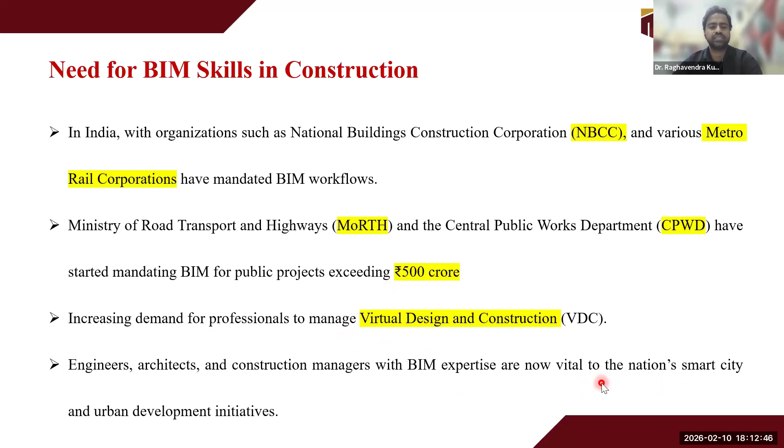So with this kind of basic background, we try to emphasize that virtual design and construction has got its prominence day by day. It is increasing, and all the professionals as well as stakeholders - that is engineers, architects, as well as construction managers - are playing a key role to enhance their BIM expertise to make sure that the nation's smart city as well as urban development initiatives are rightly incorporated.

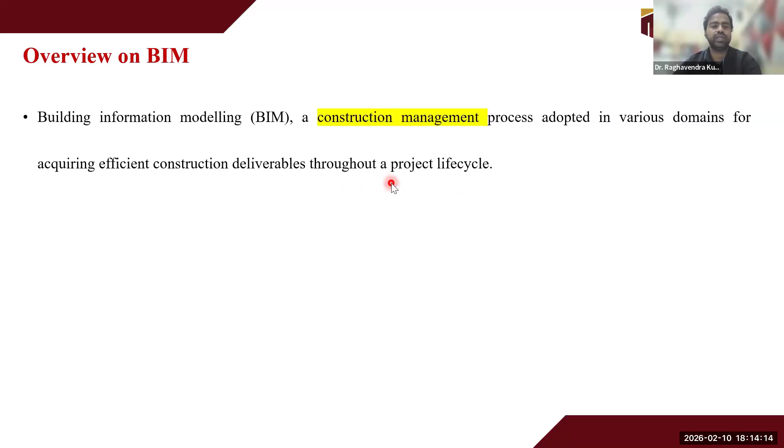So just the definition is that most textbooks or even the literature say that BIM is basically the construction management process which is adopted across the project lifecycle for achieving multiple deliverables. So now in this construction management process, you utilize or manage multiple virtual representations for each and every physical as well as functional characteristic, either it can be a building, a physical asset, or a functional asset, throughout consolidating the multidisciplinary data. So we'll be discussing what this multidisciplinary data is all about in the upcoming stages of our presentation for today.

So where we try to incorporate multiple tools, technologies, as well as software. Definitely, BIM is not just usage of one particular tool - maybe for example the very well-known or widely accepted tool is Autodesk Revit, right? It is not just one tool focused only on the aspect of 3D, which is geometric modeling, whereas it is a process where you incorporate multiple tools, technologies, and software throughout the project lifecycle. So that is the basic core point which everyone needs to comprehend when understanding the BIM process - it is basically a platform to share knowledge or information throughout the project lifecycle.

So this is the basic background which all of us are aware of. So moving ahead without discussing or emphasizing more on this, let's proceed further.

I believe this topic has been covered earlier, where we can see the multiple dimensions of BIM, as well as how the dimensions have progressed right from 3D till 10D. So currently we prefer to say 3D to ND, where you can coin the letter N as numerous dimensions, because at each and every dimension you are trying to acquire multiple data in its relevance for the project deliverable.

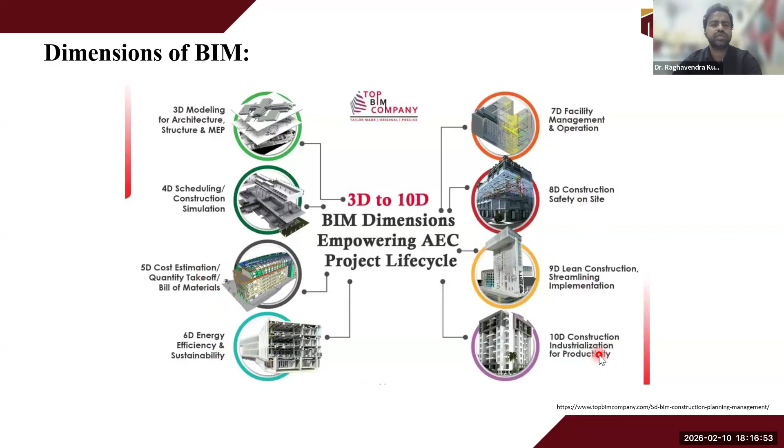So this is about the multiple dimensions in BIM. Now going to the main crux of today's topic, with respect to service management. Let's see what service management is all about.

So let's see what this BIM for service management is all about. Service management is basically about the emphasis on MEP, which is the well-known term mechanical, electrical, and plumbing technicalities. Let's see what MEP comprises of in the aspect of components.

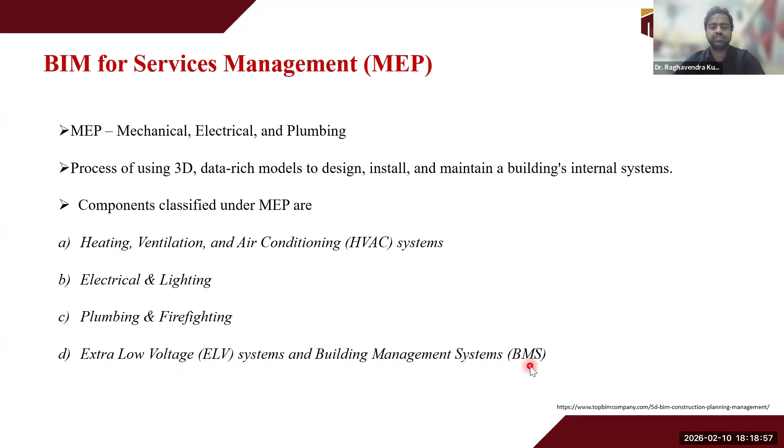So the primary components here: the first one is said to be HVAC system, which is heating, ventilation, as well as air conditioning system. Later we have electrical and lighting system. After that we have plumbing and firefighting equipment system. Next we have ELV, known as extra low voltage system, and the other one is BMS, which is focused on building management system.

Right, so here you can see one particular snapshot, or captured image, where MEP work has been done for a particular kind of industrial building, showing how the coordination can be done.

Now, just to have some responses from the audience, can I know what are these red color pipes? Let's keep it slightly academic, interactive. Can I get some responses from the audience?

Maybe firefighting related. Yes, exactly, very good answer. That is the firefighting equipment element modeling done.

Then next, moving ahead, what is this kind of pinkish color type of modeled element? If I want, I can zoom in a little bit. Yeah, this pinkish color, ash and pink colored borders.

Any responses? Sanitary fixture. Come again, you are not audible. Sanitary fittings. Actually, these are HVAC systems, right? So they are the ducts provided.

And next, any reflection on the green color pipelines? I think now your answer will suit into this. The person who has just now replied, can you say now?

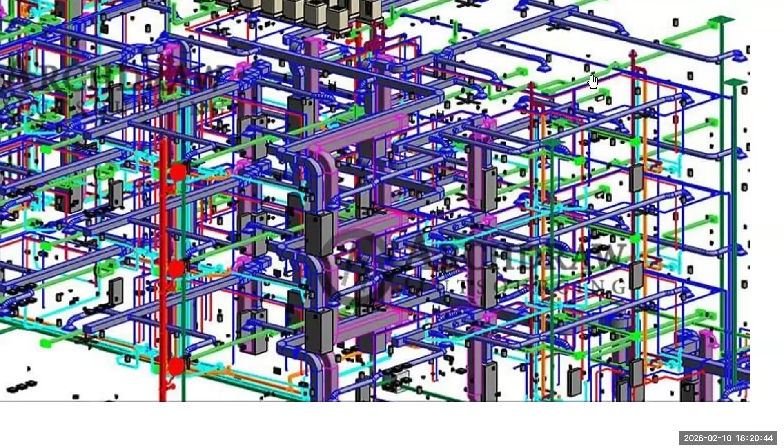Any response? What are these green color pipelines? Water pipes. Yes, madam, it is definitely water pipe.

In buildings, there are multiple types of water pipes. It can be a hot water pipeline, a cold water pipeline, or gray water, which is the drainage pipeline. Generally in Revit, we prefer to create green color pipelines as the sanitary or gray water pipelines. That is how different colors are given when you work on MEP models on any tools, representing it in a BIM environment. Thank you, we had very good responses from the participants.

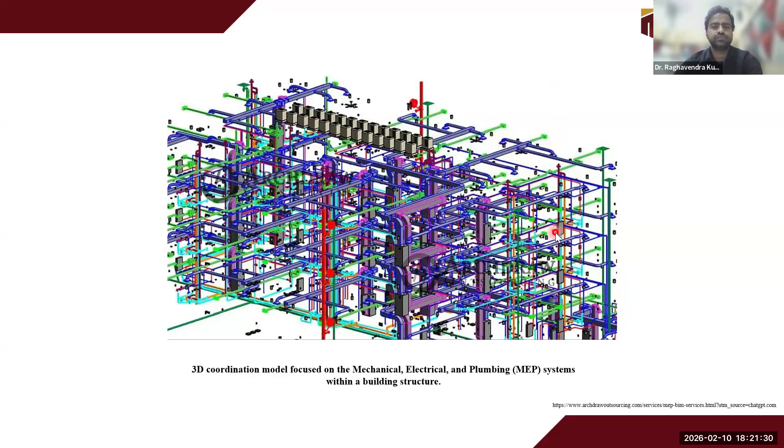Let's proceed to see the different components, with a brief or in-depth understanding. For the mechanical system, we have HVAC system as well as firefighting equipment, and also elevators as well as escalators, maybe in the case of any residential or commercial building.

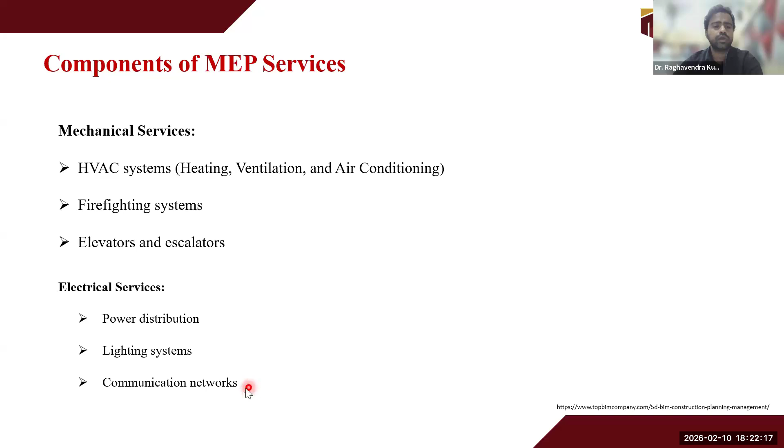Coming to electrical services, we focus on aspects such as power distribution lines, lighting systems, as well as communication networks, either with respect to CCTV, relevant ducting work, or any kind of communication network such as data cable networks, where we provide multiple landline or Wi-Fi routers and other electrical ductwork.

Here you can see some representations in the realistic appearance, with respect to the mechanical as well as electrical services.

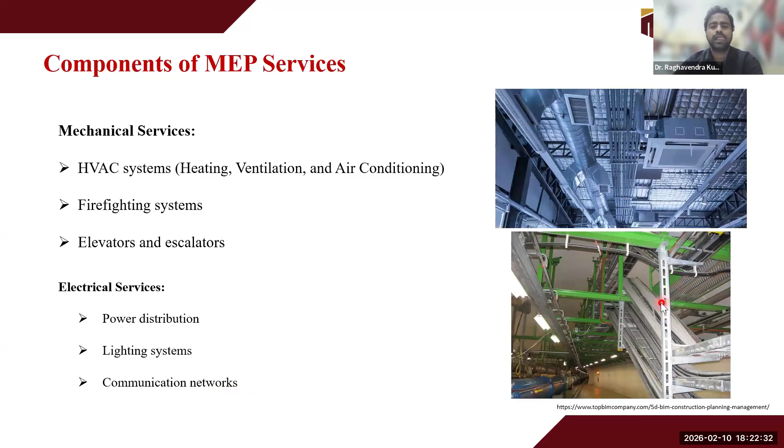Moving ahead, the next one is plumbing services, where we focus on water supply and distribution, drainage systems, and sanitation and waste management. When we say plumbing services, let's not limit our thinking only to the superstructure of the building, because besides the superstructure we have the substructure as well, where we have utility layouts - the underground utility layouts, focusing on multiple underground pipelines.

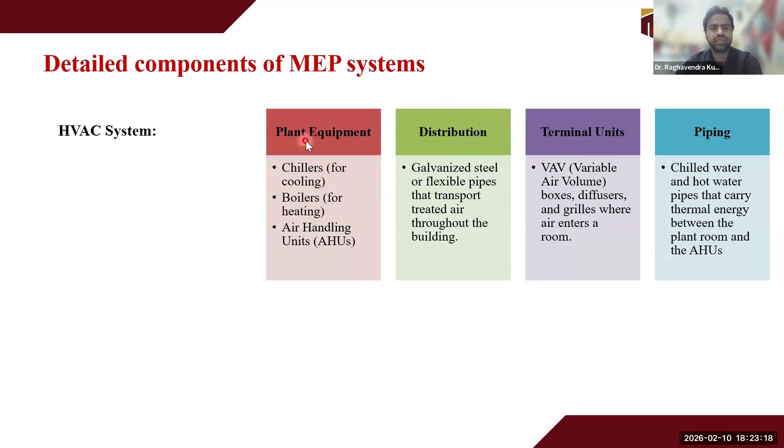Let's see the detailed components of the MEP system. The HVAC system comprises 4 categories. The first one is plant equipment, where we focus on modeling aspects such as chillers for cooling purposes, boilers, and AHU, which is air handling units.

Next, coming to distribution, we have aspects such as galvanized steel or flexible pipes that transport treated air through the building. Then terminal units, known as VAV or variable air volumes, with respect to boxes, diffusers, grills, where the air enters the room. Then piping connections, such as chilled water and hot water pipes that carry thermal energy between the plant room and the AHU.

This is one typical representation of how you can create an HVAC system for any desired building model. Let's proceed to the electrical system, focusing on aspects such as service entrance and transformers, where utility power enters the building and steps down to usable voltage. Then distribution board, with multiple MSB, main switchboards, and DB, distribution boards, which split into multiple individual circuits.

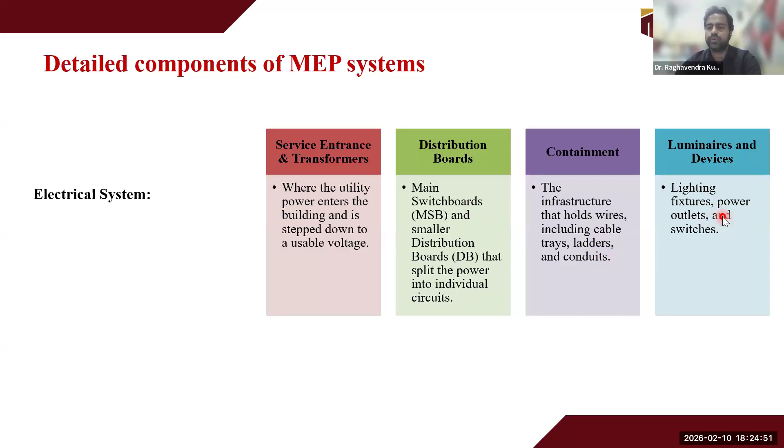Then containment is where you hold your wires as well as cable trays, ladders, and conduits, pipings etc. Luminaires as well as devices focus on the placement of multiple model components such as lighting fixtures, power outlets, and switches.

Coming to the plumbing system, as explained, we focus on both substructure and superstructure plumbing systems. This includes the network of PVC pipes which deliver potable or drinking water for sinks, showers, and kitchens, and then sanitary waste, focusing on large diameter PVC or cast iron pipes that use gravity as their main mode of water transfer.

Then the vent system, focusing on vertical pipes that extend through the roof to equalize air pressure in the drainage system. And fixtures, which cover parts such as toilets, faucets, water heaters, sinks, etc. These are some of the fixtures you focus on for placement in the plumbing system.

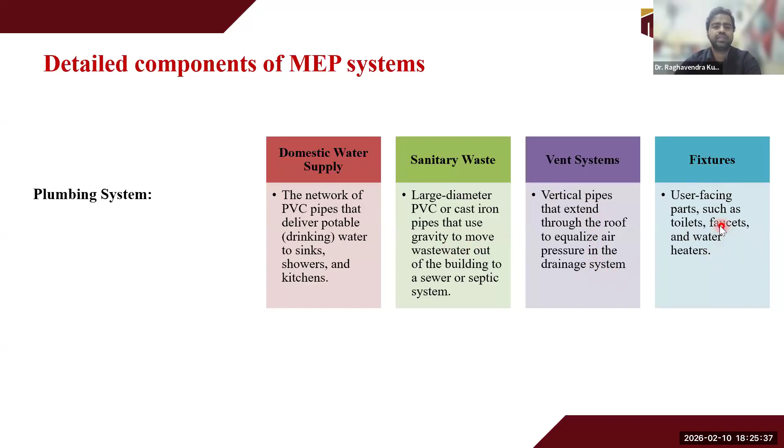So now how do you rate this, or how do you have an approach? Basically all of these multiple parts or components we discussed are assigned metadata. Metadata is a particular kind of data integrated to each component, where it's not just the physical appearance, but also includes material, flow rate, system type, etc., which will eventually help in calculating the kind of pump strong enough to push water to upper floors, or the electrical circuit if overloaded. So each part, fixture, or device installed into the building model should be assigned metadata, which is the core crux in your MEP stage.

Now let's see the different features we focus on in service management using the BIM aspect. We have multiple features divided into 3 phases. The first is design and clash detection. The second is prefabrication and logistics. The third is facility management, which will be our topic of interest for today.

Let's see individually these 3 aspects or phases focused in service management using the BIM concept or tools. Firstly, let's briefly understand what a clash is. People working in the BIM domain will be very well aware of this. Basically, a clash is a particular kind of collision or interference happening between two or more elements, where you try to reflect and see the discrepancies in the model.

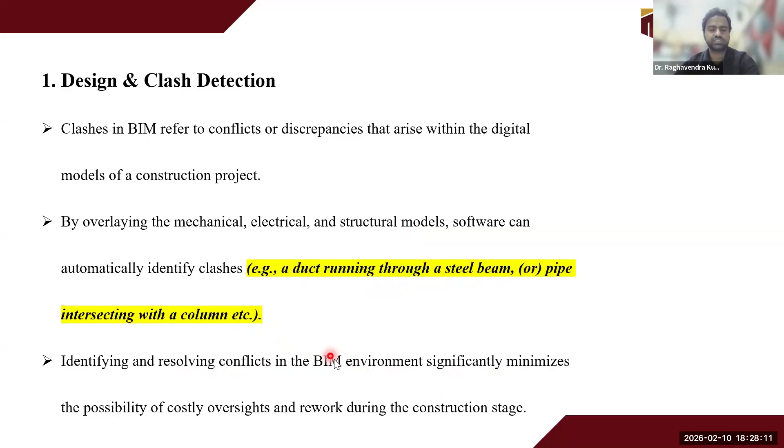For example, mechanical, electrical, and structural models are overlaid one upon the other, and after overlaying, you try to identify that one component is getting intersected or collided, or even has duplicacy in its placement. So a duct running through a steel beam can potentially be a clash, or a pipe intersecting with a column, etc. So the task for BIM environment stakeholders is to identify and resolve these conflicts or clashes. There is a particular workflow to be incorporated.

Let's see what this workflow is all about. I have zoomed into the workflow to be done. Firstly, you integrate the model, that is the multidisciplinary model. For example, you have an architecture model, then your structural model, after that your MEP model. You integrate all together and make that a coherent model or multidisciplinary model. Once you integrate and receive a federated model, you detect the clashes using n number of tools.

One of the famous tools may be, for example, Bexel Manager or Navisworks. Such a tool can be used to detect the clash. Once you detect the clash, you identify the clashes. Identification is the process where you observe what magnitude is happening, as well as what is the placement of the particular clash beyond the structure. Then you report the clash, generating the clash report, and proceed further for the resolution.

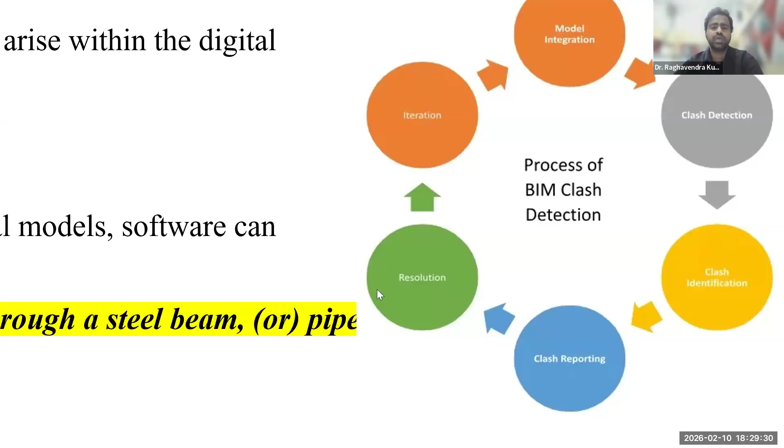So the resolution of the clash should be done back again in the authoring tool itself, that is, wherever you developed the model, maybe Revit or Tekla Structures, your design authoring tool. There you should resolve the clash and see what different iterations are possible with the multiple clash-free or clash-detected elements, where you're trying to rectify and resolve it. Then the final feasible iteration will again be integrated and made sure that it's a clash-free model. That is about the design and clash detection which can be performed in this task.

Going a little further ahead, let's see the different types of clashes in the BIM environment. The first one is a hard clash, shown in the picture on the right side, which helps check the clashes between an individual group of elements, detecting whether the elements go through each other or not.

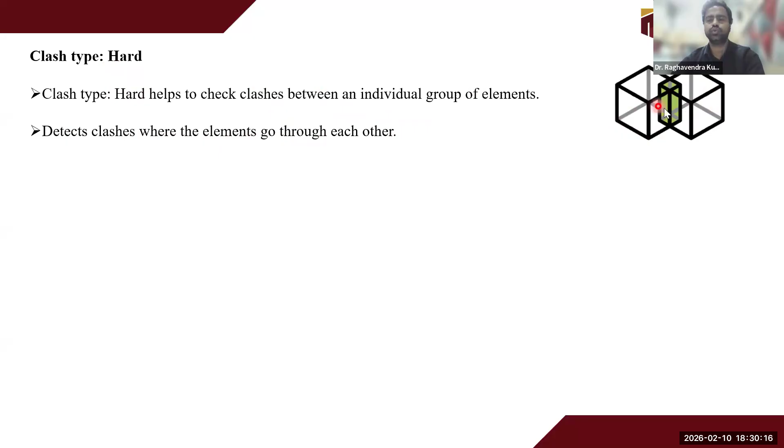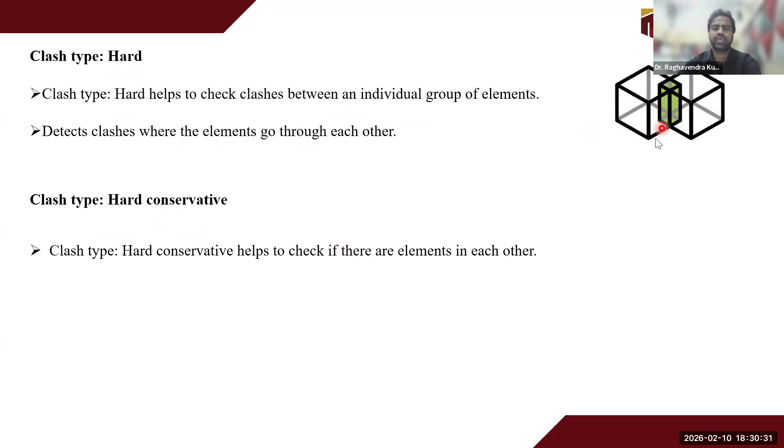You can identify that from the first type, that is the hard clash. The second clash we have is the hard conservative, where you check if there are elements within each other after having a hard clash, and later check again if there are some more elements happening in that. That is hard conservative.

Then you have the clearance clash, where there might not be a clash happening, but it is entering the buffer zone, which might not be feasible to execute in a practical way. For example, there needs to be some minimum spacing given for a column as well as a window, which is an architectural component. You cannot place both components very side by side.

Then the next type of clash we have is a duplicate clash, where you can see one model getting completely overlapped with another model. That is said to be a duplicate clash.

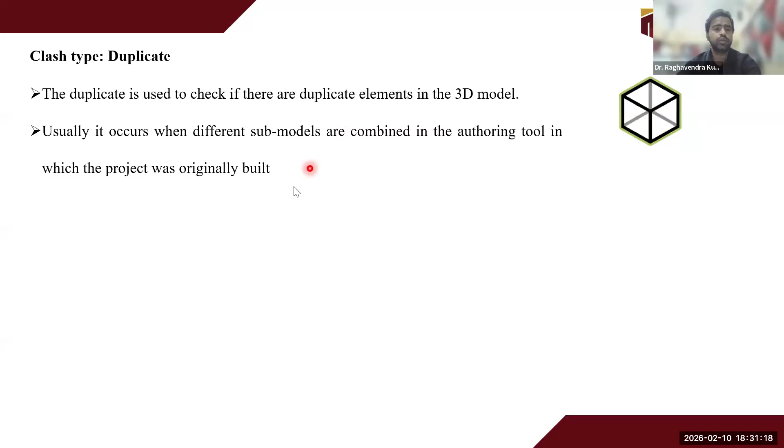And then the other type of clash we have is the containment clash, where there are multiple elements or more elements within the defined or constrained room or space, rather than one or more other container elements. So these are the different types of clashes which you can look forward to and try to detect when working with the aspect of MEP models.

We will have a slight demo after we finish the entire presentation for today. We will run a particular clash test for an MEP model and check how the clashes can be detected. Now, the next phase in this service management using the BIM environment is the second phase after the first one, which is clash design and clash detection.

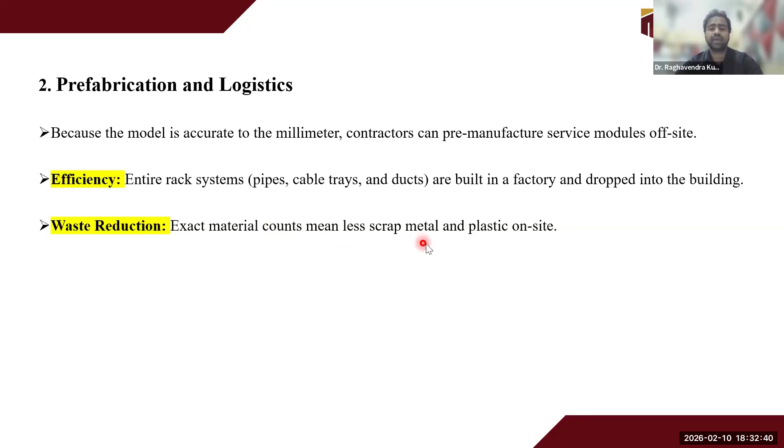The second phase we have is prefabrication and logistics. So let's see what is the potential of this. With model accuracy in millimeters, contractors can pre-manufacture all the service modules offsite itself. Efficiency can be focused on the entire rack system, such as pipes, cable trays, and ducts, which are built in a factory and then dropped into the building. You can also focus on waste reduction, which can eventually be a hazard at the construction site, since the exact material counts mean less scrap metal needs to be taken to the site and assembled during construction.

And then the next one, we have the third phase, that is facility management. Facility management is entirely about the post-construction aspect - what is the core crux of your asset or the particular facility you have created in the building. It can be a swimming pool, an elevator, an HVAC duct, or a sprinkler system.

What entire type of maintenance you are trying to focus on for this particular asset is what we focus on in the facility management aspect, where the BIM model itself becomes a digital manual for the entire life of the building. You track the asset with the model dependent on manufacture date, warranty info, as well as maintenance history. Then IoT integration can be done into this stage, where the latest BIM applications are used to establish a very good interface between the real-time model and the virtual model.

Here you can see a slight workflow on the right side of the presentation, where you have the 3D model, and you try to interpret the asset data as well as maintenance schedule and the IoT sensors, which are integrated from the real-time construction. Then you can use it in virtual dashboards, for example tools such as Power BI, to eventually reflect on your facility management aspect. That is about facility management, which covers the three key phases in service management using BIM.

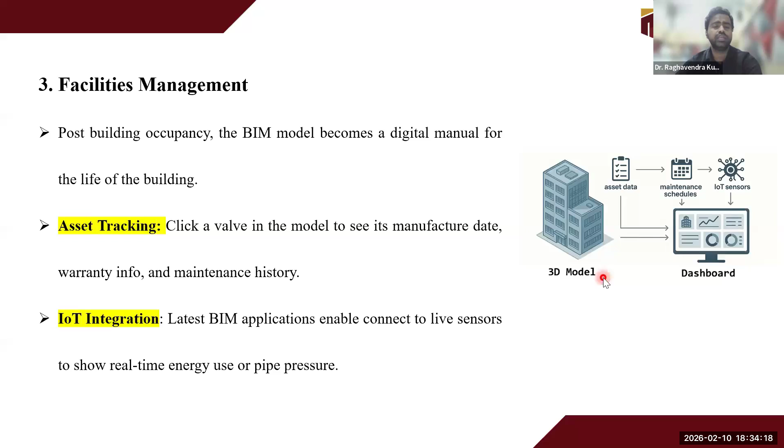The first one is Autodesk Revit, a prominent tool helpful for the authoring purpose of design and analysis. For clash detection and coordination, you can focus on Autodesk Navisworks. Another one is MagicAD, which helps in the mechanical design solution, and also Dynamo, which is a latest plugin for computational design purposes, where you can eventually speed up the entire modeling or design aspect.

Then we have the other collaboration platform, ACC, known as Autodesk Construction Cloud. So this is about the tools for BIM in the MEP stage. That brings down to the first stage of my discussion with respect to BIM for service management.

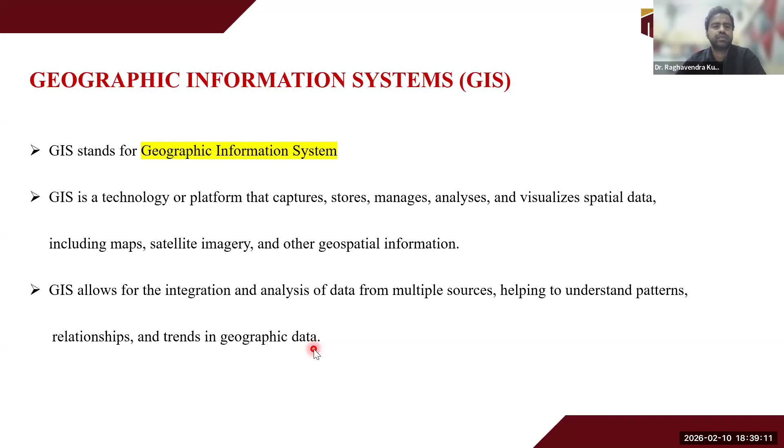We have multiple sources here, maybe a Bhuvan portal, or a number of paid or unpaid platforms, also free portals, where you get the data from the sources and help in understanding the patterns, relationships, as well as trends in the geographic data. It can be rainfall data, population data, or any kind of water data or disease data. It is unlimited, or the range is large.

So that is with respect to geographic information system. So what does it address? Basically it can address a location, a quantity, or the measurement, whatever you have focused on, and it helps in understanding the patterns as well as trends, and also reflecting the surrounding conditions, relationships, as well as topographical establishments, and also implications or predictive analysis which you are planning for the future.

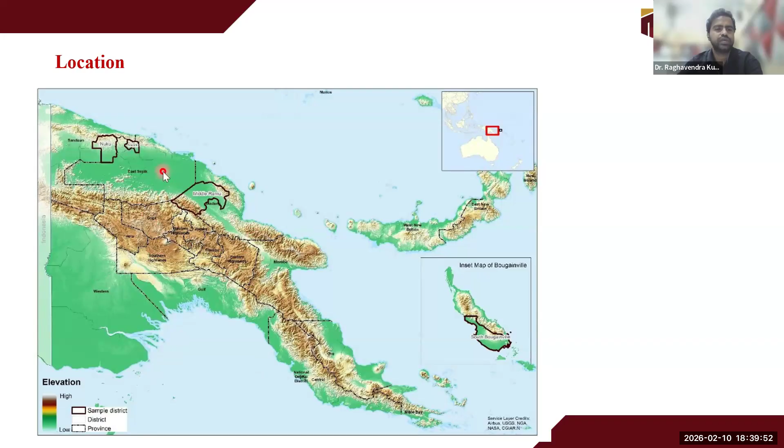So eventually you can have an understanding like this, focusing on how the topography is there in this particular location, representing the sea, the rock, as well as the green cover. So that is some understanding with respect to this particular map.

Now let's see the context of BIM and GIS integration. Unlike a building with a fixed footprint, infrastructure lives within the landscape. It needs the entire overlay or understanding of the topography, how the infrastructure will look after construction happens. So BIM models are overlaid onto GIS data, where topography, soil types, and existing underground utility lines are enabled to understand the environmental impact.

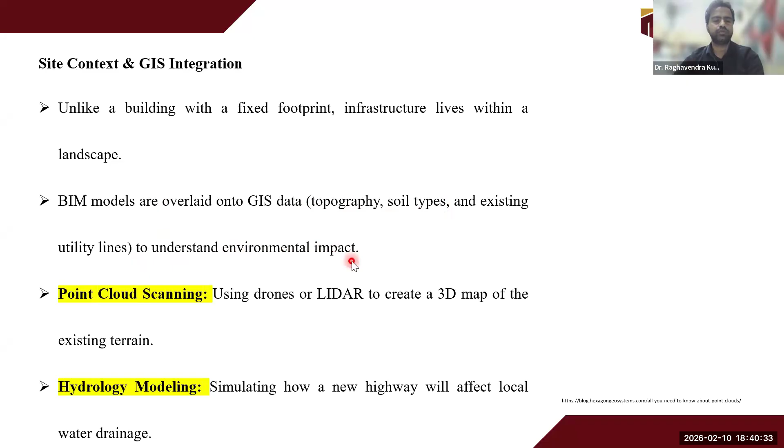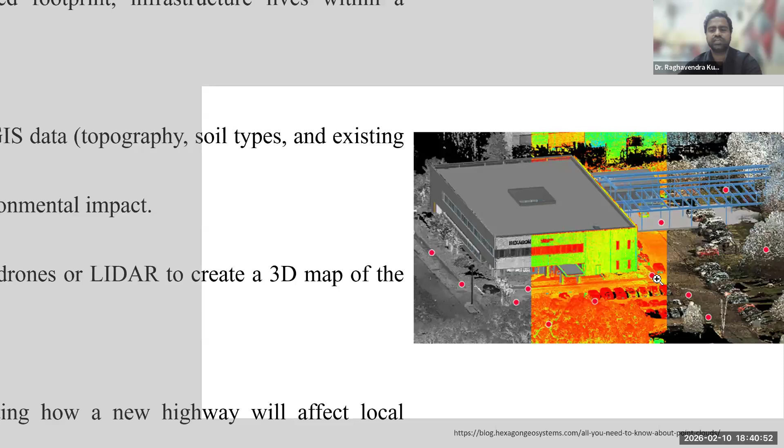Now, to make realistic conditions reflected as GIS data, one of the prominent or latest tools we use is drone or lidar, which helps in creating a 3D map of the existing terrain. A point cloud can be generated using any UAV, that is your unmanned aerial vehicle, which will eventually help in understanding the true or real condition of the particular geography.

And then you can also try to simulate hydrological modeling, where you can simulate a new highway which will affect your water drainage, etc. So that is with respect to site context and GIS integration.

So you're focusing on alignment planning, such as optimizing the path of a road to minimize earthworks, cutting of hills, or backfilling of valleys, etc.

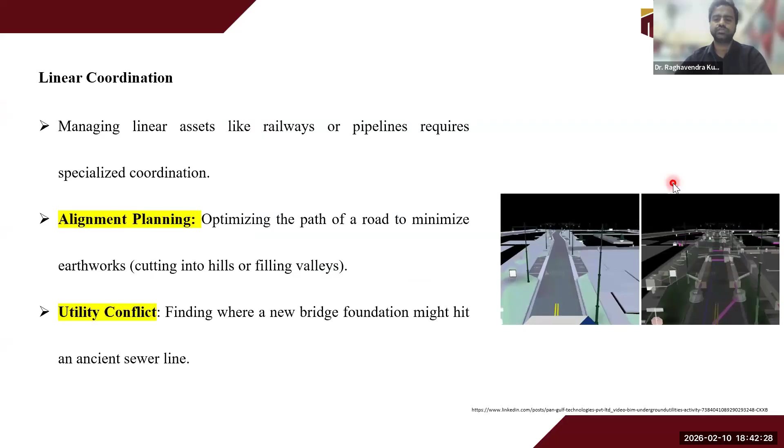And also utility conflicts, finding where a new bridge foundation might hit or overlap with an ancient sewer. Utility conflict is something we discussed earlier, that is a clash, where you focus on understanding whether these underground utilities are having any clash or conflict, or interference with one or more elements, or a seamless arrangement in the substructure.

So let's see the workflow, how this can be done. In this aspect, BIM basically focuses on a high level of detailing. When focusing on BIM in an architectural parameter, you might be exposed to a topic known as LOD, level of development, from the conceptual design LOD 100 till the last one, LOD 500, known as the as-built model, where you're entirely focusing on each and every minute detail in the geometric modeling aspect.

Then in the aspect of GIS, it focuses especially on the building position concerning the environmental context as well as the global coordinate system with respect to the project you're planning to establish. So when you integrate both these concepts, it will eventually help you fetch high detail building data with the real world geographic context.

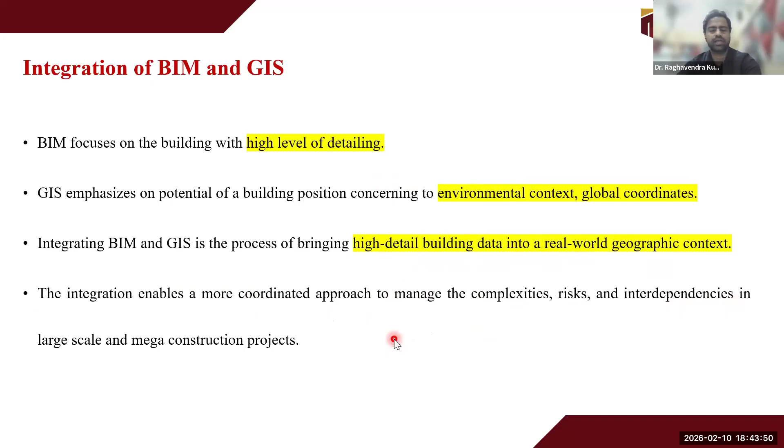So with the advantage of both these platforms, you will finally get a very seamless realistic world representation. This integration helps a more coordinated approach to manage the complexities, risks and interdependencies in large scale as well as mega construction projects. We will discuss that ahead with a couple of case studies also.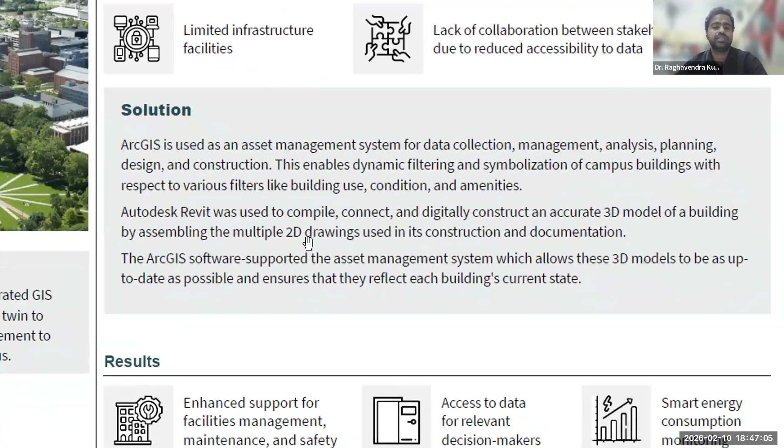Then Revit was used to compile and connect the digital construction of an accurate 3D building model, which had been done by assembling the multiple 2D drawings used in construction and documentation.

Eventually, the results in this particular case focused on enhanced support for facility management, as well as maintenance and safety, and access to data for relevant decision makers, as well as smart energy consumption monitoring, done throughout the project life cycle. That is with respect to the first case study.

Let's see the second case study: design coordination tracking for collaboration of the HS2 railway line, in London, Birmingham, UK. Let's see what is the basic challenge with respect to this project.

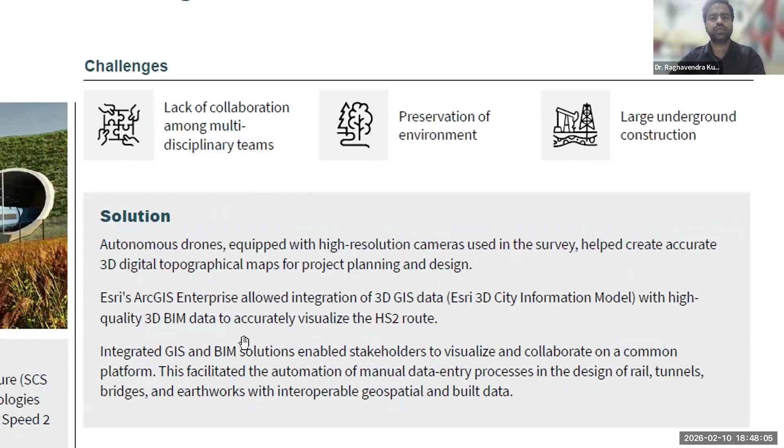The challenges faced in this particular case are lack of collaboration among the multidisciplinary teams. Since it is a railway project, you will understand that the structural team, GIS engineers, and MEP engineers are working together in the railway line alignment etc. Then there's preservation of environment, as well as a large underground construction involved for this entire stretch of the railway project.

Let's see the solutions, how they approached this. Autonomous drones equipped with high resolution cameras were used to help in capturing the survey data, where they acquired an accurate 3D digital topographical map.

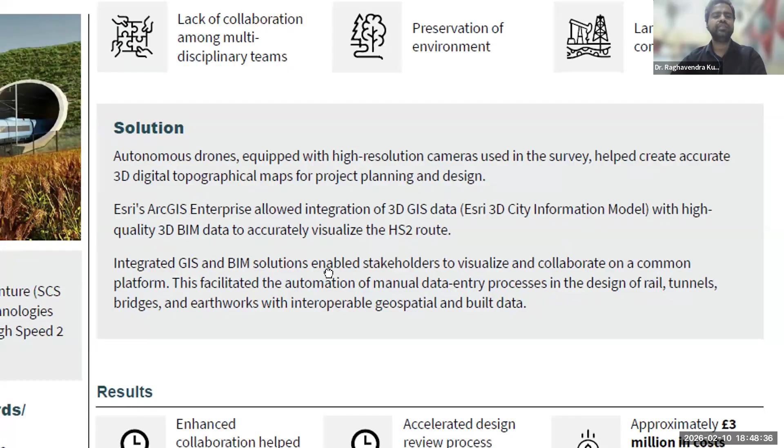ArcGIS Enterprise allowed integration of 3D GIS data into the Esri CIM, that is city information model, with high quality 3D BIM data. This integration eventually helped all the stakeholders visualize and collaborate on common platforms, and they automated the manual data entry process in the design of rail, tunnels, bridges, and earthworks.

The focused results are that 30% of project duration was saved in the planning stage itself, the accelerated design process saved 20% of time in the design stage, and approximately 3 million pounds was saved in the cost of the pre-construction phase of this particular project.

So this is about the application of BIM and GIS integration in infrastructure management. Let's see some tools in this regard. What are the different tools we have?

Tools in this integration include Autodesk Civil 3D as well as InfraWorks, which focus on roads, drainage, and site grading. Then we have the very famous tools from Bentley, Open Roads as well as Open Bridge, which focus on large scale rail as well as bridge infrastructure.

Then we have Autodesk InfraWorks, as well as the Forma add-in for Autodesk Revit to import your GIS data, as well as the ArcGIS GeoBIM platform, which is an integration for this entire simulation of BIM GIS integration.

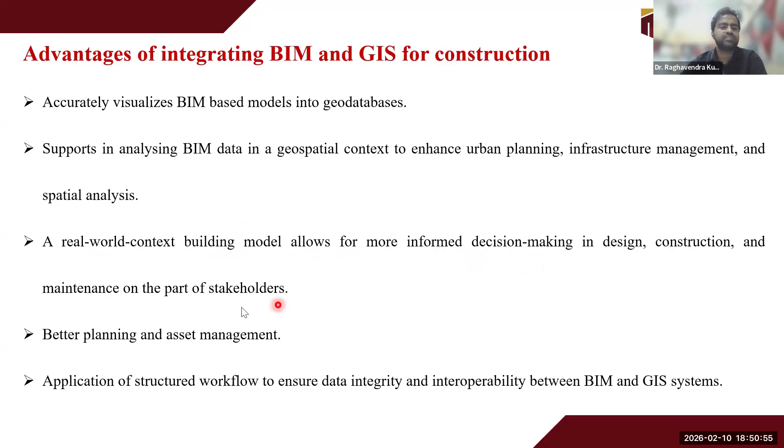Whether it can be an urban planning project, or infrastructure management, smart city planning, etc., or spatial analysis, it eventually helps in the real world context of any particular building model, which allows informed decision making for multiple stakeholders and the relevant planning stages. It also helps in the asset management process as well.

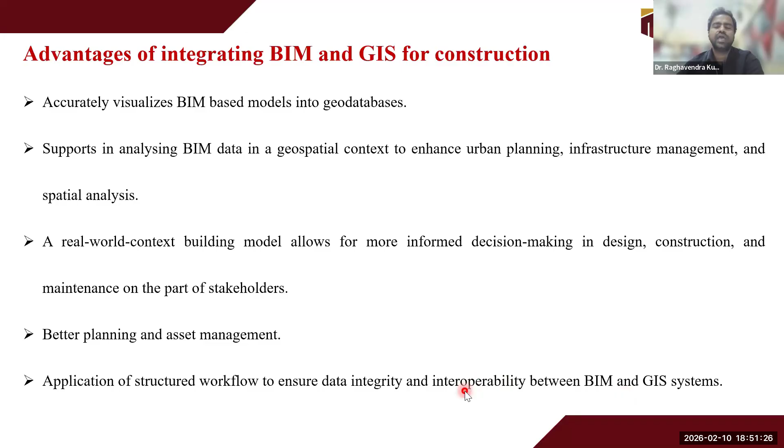Application of this structured workflow will ensure data integrity as well as interoperability among the BIM and GIS system, where you will not have any data restriction or closed BIM environment. Everything is evaluated and executed in an open BIM environment, where you can use multiple platforms without any data restriction.

And eventually it is encouraging the scope of interoperability in a BIM environment through open BIM context. So let's see the conclusion for both stages: the first topic of BIM for services management, as well as BIM for infrastructure management. Firstly, as we know, BIM is not just about any one particular software or tool.

Basically, it is an entire construction management process which is applied throughout a project lifecycle as a strategy, where the designers can eliminate the physical conflicts before execution, and the contractors can build faster and safer using their prefabrication works.

And also the BIM and GIS integration, which was our second topic with respect to infrastructure management, is changing the construction and infrastructure industries. This combination of BIM and GIS with spatial context is enabling multiple stakeholders and project teams with an opportunity to make projects more sustainable as well as smarter with cost-effective outcomes.

And also this application of BIM and GIS is very vast. You can see the case studies as well, where you can apply it to multiple aspects such as urban planning, solar power projects, highway construction, disaster management, etc. So that is with respect to the topic given to me, that is BIM for infrastructure as well as services management.

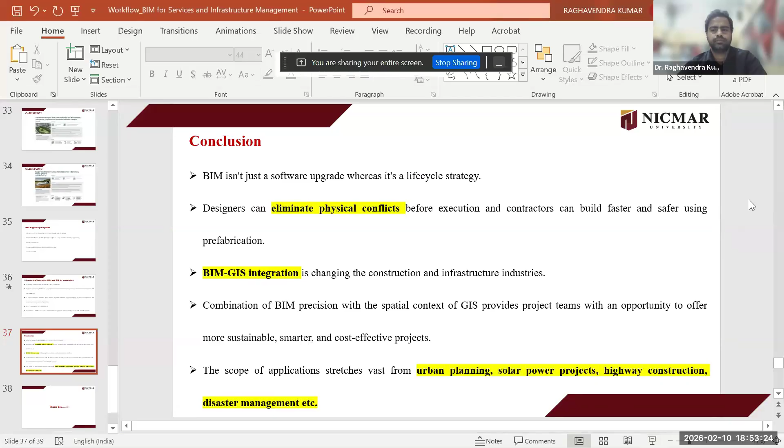Very good evening, sir. Yes, please. Very good evening, sir. Till now, presentation was very good, sir.

The BIM application is used for treatment plants, wastewater treatment plants or sewage treatment plants. It is possible, sir. Any dam structure designs? Yes, we can definitely use BIM and GIS integration for wastewater treatment plants as well.

You eventually know that wastewater treatment has multiple stages of treatment it undergoes. So you can entirely fetch the digital twin of the entire wastewater treatment plant, and then make sure that any changes or modifications you want to apply to the real-time construction are employed through the digital twin in a seamless manner, ensuring the changes are replicable to the real-time construction as well. Yes, that is very much possible in the domain of BIM and GIS integration.

It is suited for dam structures also, sir. Yes, we have multiple case studies for dam structures as well. If I can recall, one of the dams in China was also covered in a paper I read, which was the usage of the BIM concept itself.

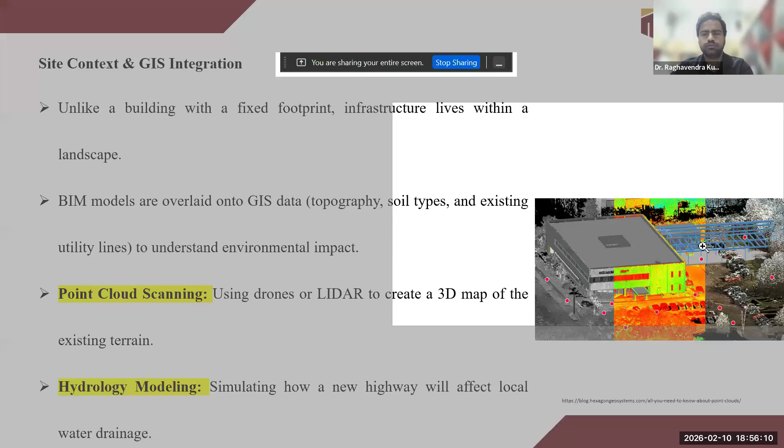When you are capturing the data using your drone or any particular tool, there are multiple formats to fetch this data. One format is point cloud data, and you can also get the entire data as a PDF image with lines and other commands. You can then use that data to build the entire structure in a 3D way, and for that there are multiple tools.

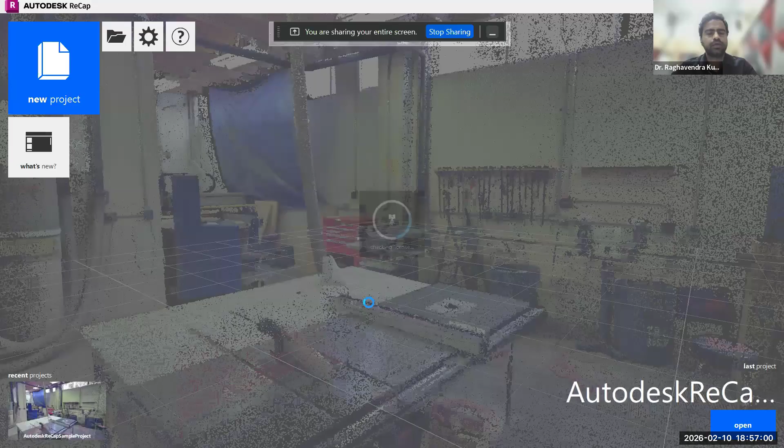One tool I would suggest is Autodesk Recap. I'd like to run it for your understanding. Using this, you will get something like this at the initial stage, where everything is in the form of point cloud data. Can you see this?

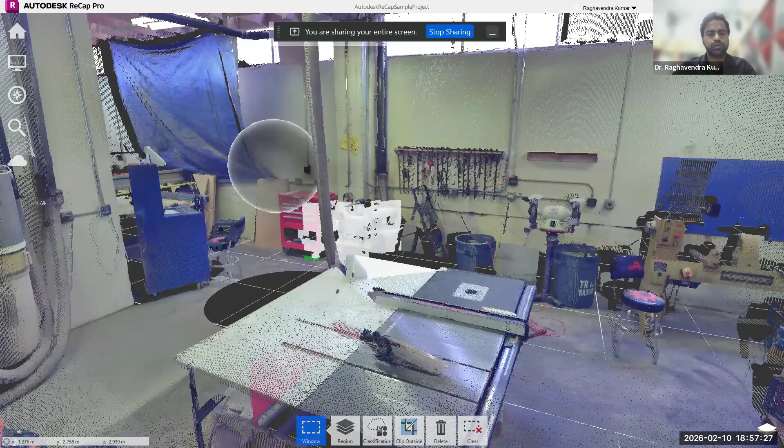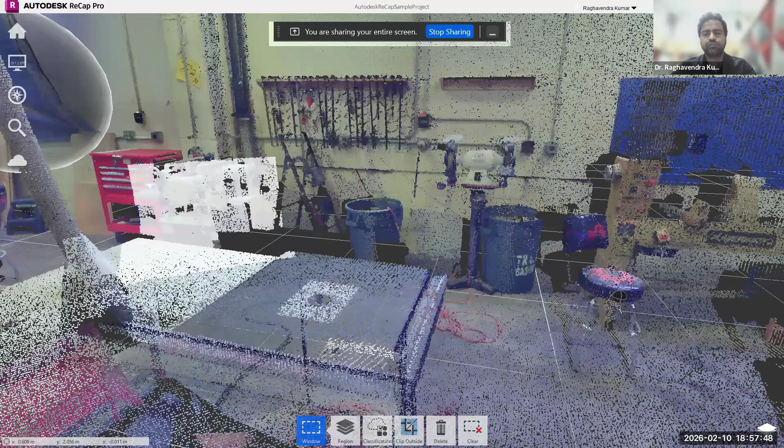Am I right? Yes sir. Now you use this point cloud data, import it to Revit, and recreate the entire structure based on how you captured the data. This can be done right away from Revit itself.

So one particular topic you can refer to is the aspect of Heritage BIM. If you see multiple case studies, for example Roman or Italian structures, most renovation projects happen through this concept of HBIM only. I'll display that here in the chat box. HBIM stands for heritage building, heritage BIM, or some people also call it historic BIM. So all your heritage structures are being renovated or reconstructed using this particular concept.

So that is one of the main useful applications using your drones, or any laser scanners, lidar scanners, etc. Not just drones, but also lidars.

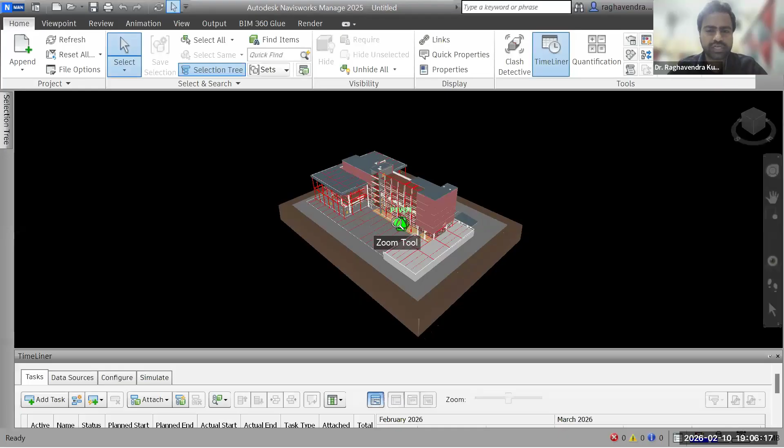So here I have tried to load one project in Autodesk Navisworks. When I selected files, you would have observed that I selected three files. Let me show that again. So here you can see it is a structural file, MEP file, as well as the architectural file. This is the composition of that particular file where I have integrated and made it a federated model to run the clash test.

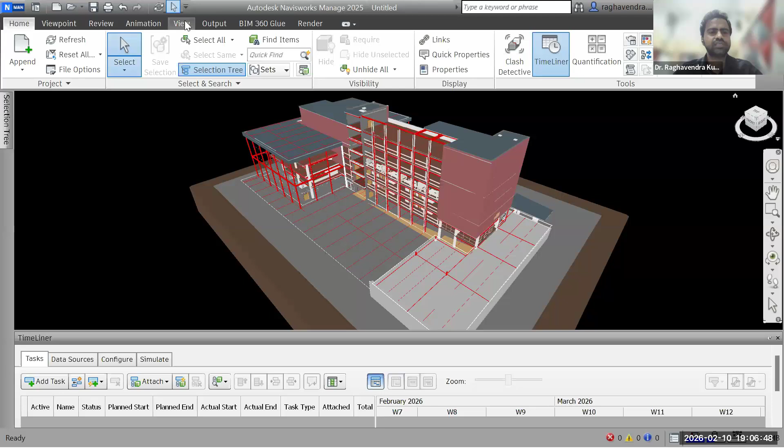So just to cross verify that, let's see the section view of it. Now you can see what the building is made up of. This is the model which we have integrated now.

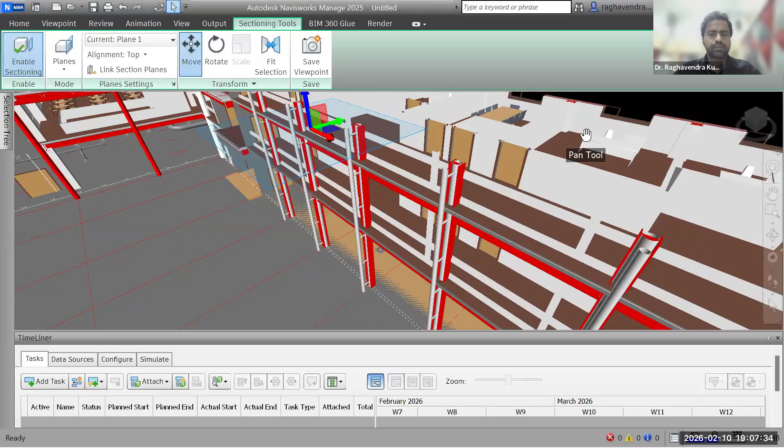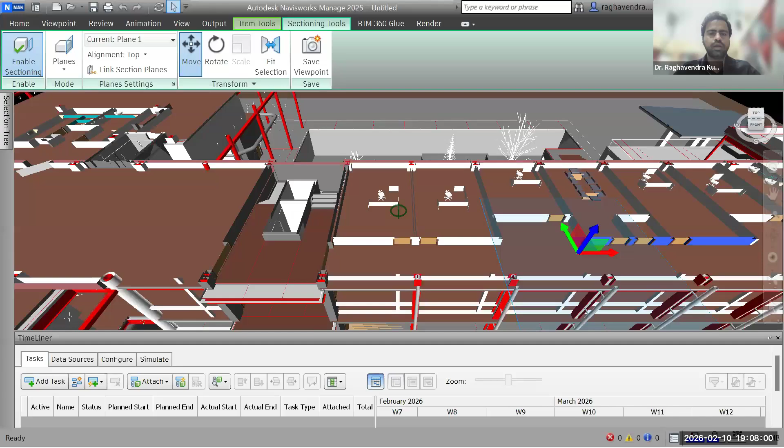Here you can see that basically you might think everything is very proper and does not have any issue. That might be the general perception that all the building components are placed in a very proper manner. This is how you can perform a section for the loaded model and see what different components comprise it.

Just to show this selection tree, here you can see these are the different levels created for the model. So there's the architecture model, the MEP model, as well as the structural model. And in each model, we can see the different components.

Even in the basement, we have the building components. So this is the basement portion. Here also we have the footing and the relevant components. That's how we can check it using the section option.

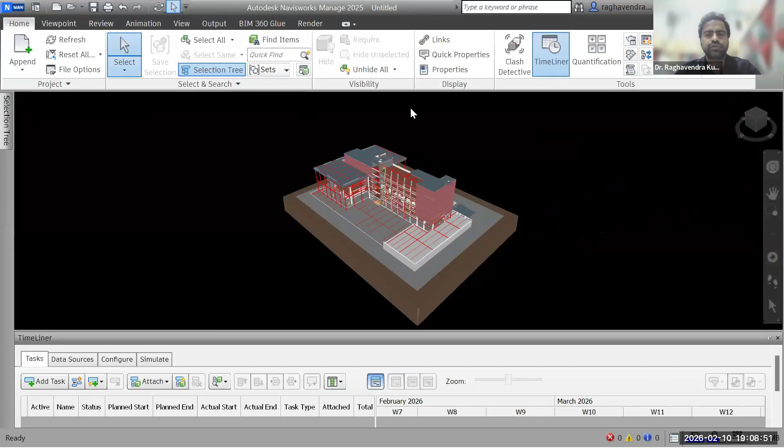Now let's see how to run the clash test. Firstly, on the home page, there's an option known as Clash Detective. You should enable that option. After enabling it, expand this tab and observe that there are two selections, one is Selection A and the other is Selection B. Let me explain what Selection A and Selection B are.

Generally, the purpose of a clash test is to identify if there are any collisions or clashes happening among the elements of architecture as one set, versus MEP as the other set of components. You can take that as one discipline against another discipline, or one component against other components. It always has to be something like A versus B. So on Selection A you take one set, and on Selection B you take another set.

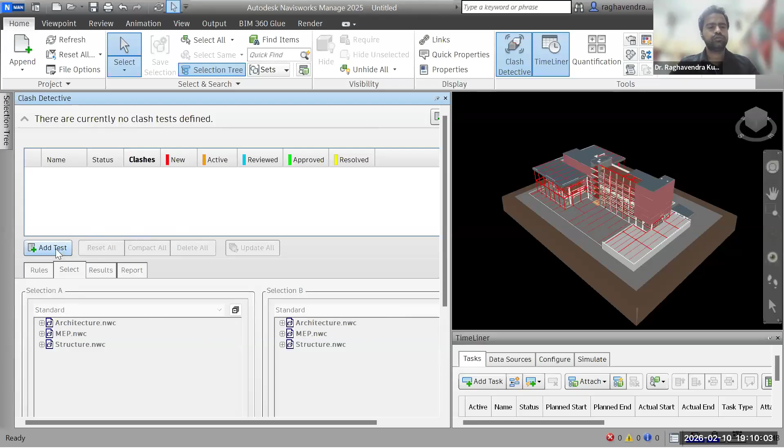But first we have to add a test. For example, I've clicked on Add Test and then I'll name the test. Let me make it 'Clash Test 1.' So that's the name I've given. After giving the name, you can see it's a new clash test.

After that, since before I did not create any clash test, all these selection sets were disabled. Now, as soon as I create a clash test, I can select multiple selection components from Selection A and Selection B. You can click on this plus symbol and see the expansion of each and every discipline.

Now what we shall do is run a test between the architectural components against the MEP components. So I've selected Selection A as architectural, and Selection B as MEP. If you drop down here, there's one more option for the type of selection: standard selection, compact selection, and property selection.

Standard selection is where each and every discipline gets selected right away. You can see that in each discipline there are multiple levels, and in multiple levels there are multiple components as well. That's how the standard selection works.

Now, when I change it to compact, you can see that you will not see the different components in each level. Are you able to see the different components in each level? Can you see the difference? Can anyone respond?

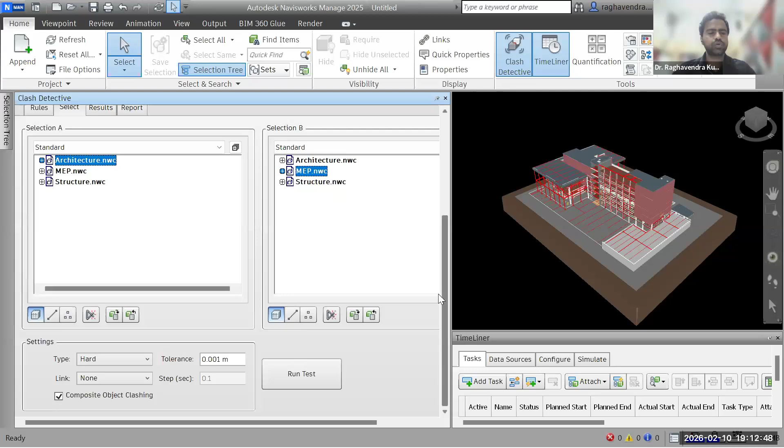let's scroll down a little bit. Now here, if you see this, we have studied about multiple clash types, right? So those clash types can be viewed here: hard clash, hard conservative, clearance, and duplicates. So one more clash type - can anyone tell what is not available here?

We have referred to 5 types, only 4 are available here. What is the other type of clash? Any response? Okay, no problem. The other type of clash we have is containment clash.

This is a basic kind of limitation in the Navisworks tool, whereas that type of clash is available in the other tool I've shown you before, that is Bexel Manager. So you can select the type of clash here.

For example, I'm keeping it as hard clash only. After that, we can set the tolerance limit. The tolerance limit is something like a permissible limit - beyond or beneath that, those kinds of clashes will not be identified.

So I am setting the particular tolerance limit, and then you want to link it with timeliner. Of course, we did not discuss timeliner here, so I'm not emphasizing much on that - basically, timeliner is a simulation aspect you can perform in the Navisworks tool.

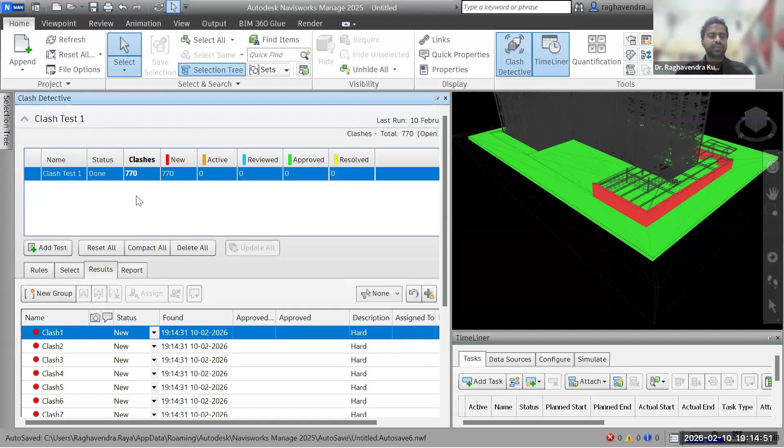You can see that totally - let's go to the dashboard and observe the total number of clashes. So for the set values and the given references, the total clashes we have got are 770 clashes, which means completely there are 770 clashes in this building model.

You can see here, whenever you tap on the relevant clash, it will redirect you to the particular view. For example, I'm selecting clash number 22. So here there is a clash, that's why it is highlighted in red. You can press on the relevant clash and observe what clash has happened in the model.

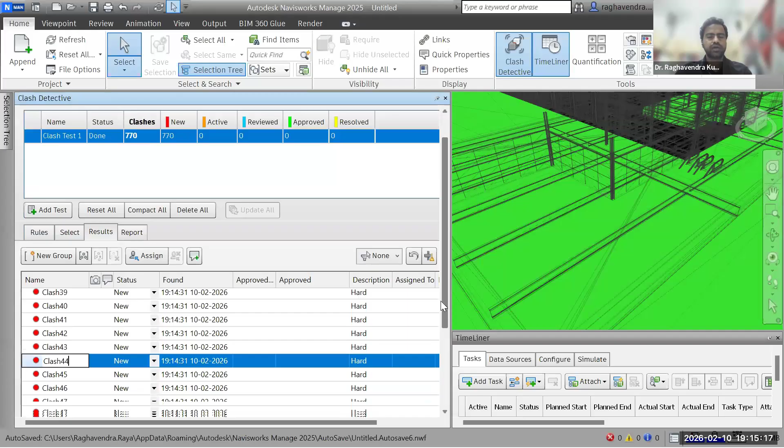So here also you can observe for clash 44. To understand that, you can just scroll to the right and observe the magnitude of the clash as well as what type of clash has occurred, and all those details you can see. On the right side there is one more option known as display settings, where you can see what type of viewpoint you have set and the relevant details.

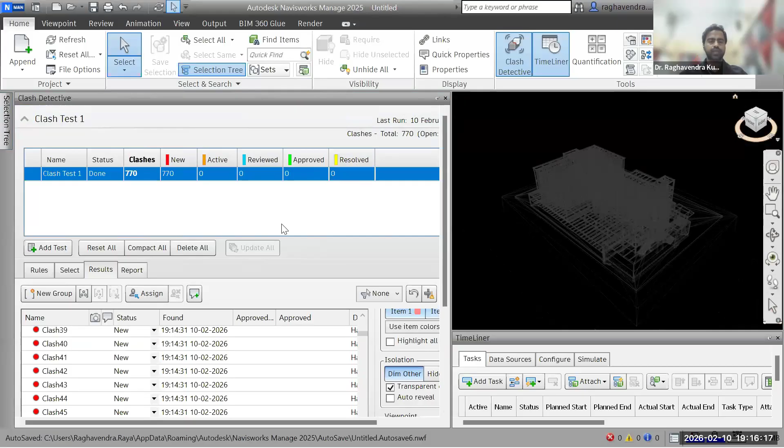Now the next task in this project is that these clashes should be resolved, for which you should take this project back to the model where you authored it. That is, maybe for example in Revit, you have modeled or authored this building. Then you should take this model back to that particular tool and assign this entire report to the modeler and make sure all these clashes are resolved in the tool.

So like this, you can generate a report of this. For example, I'm taking this option to the report, and then you can see each and every field I want in the report - I can select it. After that, I can select the report format, and then selecting it, I can click on this one.

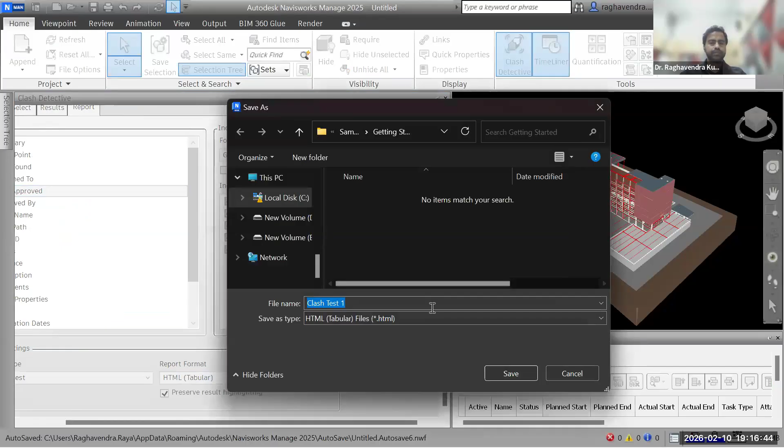So let me change some settings because I have some restrictions here.

Maybe right now I'm not able to save it, but definitely you people can save this in the format of any report in this particular format type. So that is with respect to the clash test. Is it clear?

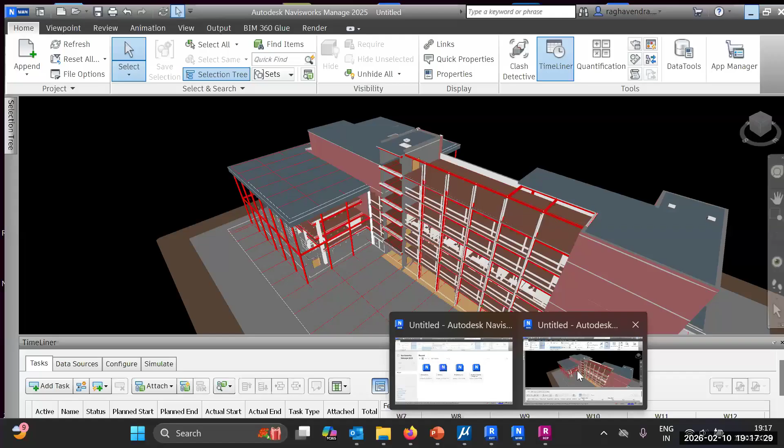Sir, in the window where we have seen four types of clashes, where containment was not there, in that window, in the same space, right side bottom, there was some step. What is that step? This step, this is the total seconds for running the test, sir.

Okay, something like in ANSYS, we give stepwise computation. Is that close to something like that only, sir? It does not have much prominence, sir. You cannot add any field there. It does not have much impact on the model and running the test.

Not an issue. One more question, student side, just out of curiosity. In software side, when these coding engineers do their work and pass the job done, it goes finally to the quality assurance division. So similar to quality assurance in software sector, will there be exclusive engineers in this domain who can identify clashes and solve them exclusively for that purpose? Sir, the BIM modelers will do those kind of tasks in this domain.

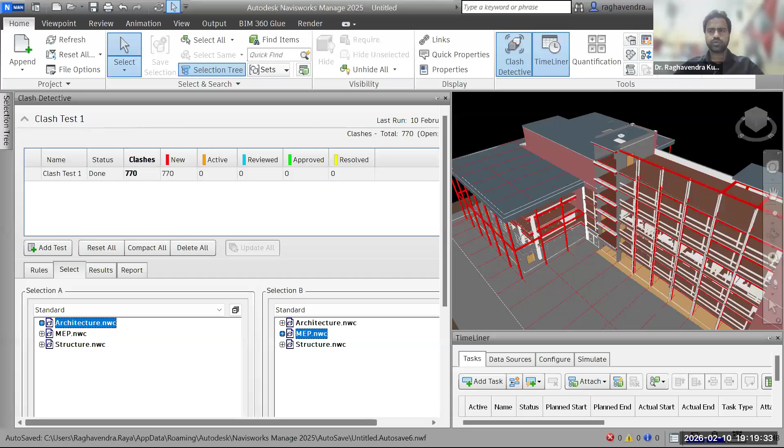I will close this. So the next tool here we have is Revit. Let me open that for the purpose of MEP modeling. Please wait for a couple of minutes.

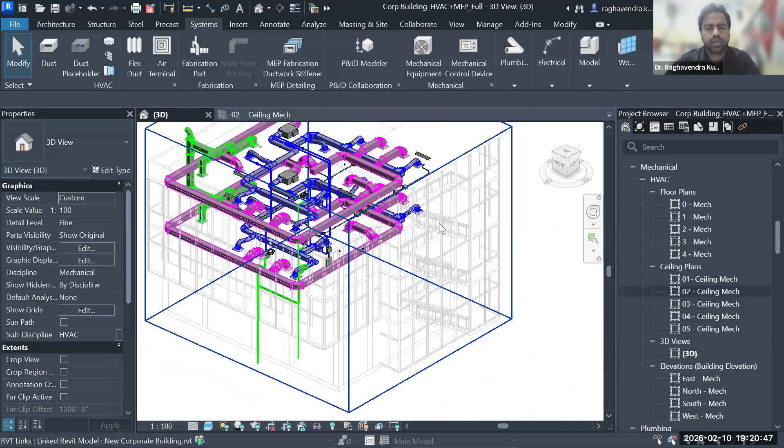So here you can observe that I have tried to represent one of the student projects performed here at our campus. So basically you can see that the model, which is not in a dark shade, is dim, is basically the architectural model. Using that architectural model, we have tried to create the HVAC, or if not the entire MEP, we have done for this particular project work.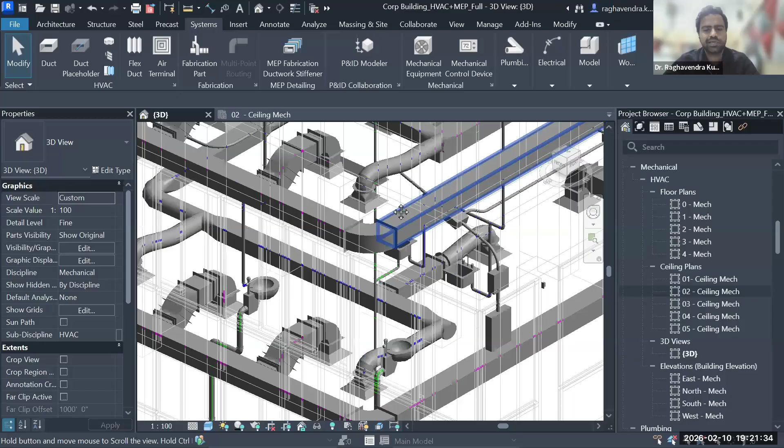So here you can see how the different connections have been performed. For example, all these are your HVAC ducts, and these are the air terminals and its relevant flex ducts, so that is for the HVAC part. Then here you can see there are some fixtures, that is your sink, where the pipe running ahead is basically the aspect of your overhead tank pipe connection. And here the line going beneath, in green color, is basically the one for the drainage pipe, which will go to the substructure work. So that is how you can do that.

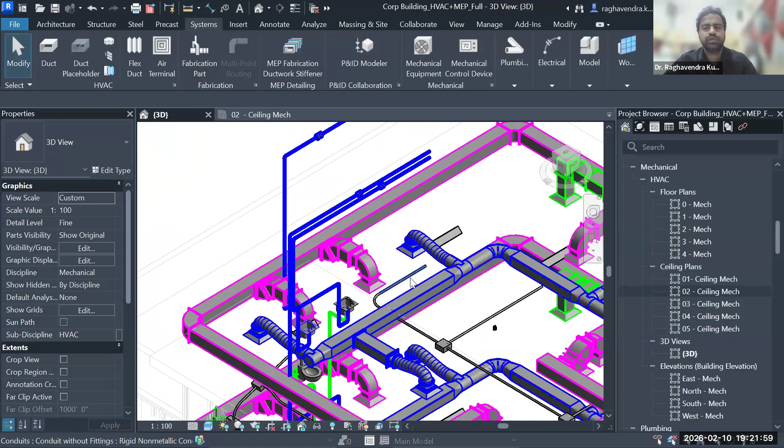And one more thing here, you can see how the walls and other aspects have been created. Now, those who are very much familiar with Revit, I don't think I have to explain the user interface. But when you work in the aspect of MEP, the first thing to be noted here is always your MEP works should be worked on the ceiling plans, for example HVAC ducts as well as your electrical works.

Whenever you create the particular discipline as well as the floor plan, when you have that, you will use that as a reference, and the modeling will be done in the aspect of your ceiling plans only. So that's why here you can see I have opened a ceiling plan, where you can see how the ducts have been placed. This is the second floor ceiling plan for the mechanical aspect.

So here you can see the different disciplines on the right. For electrical, you have floor plans as well as ceiling plans, so whenever you want to work on electrical components, you take its relevant ceiling plan. For mechanical, you also create the HVAC template using the ceiling plan. For plumbing, you use the relevant floor plan, and you might not require a ceiling plan unless you have an overhead tank to be placed. Otherwise, you can proceed with your floor plans.

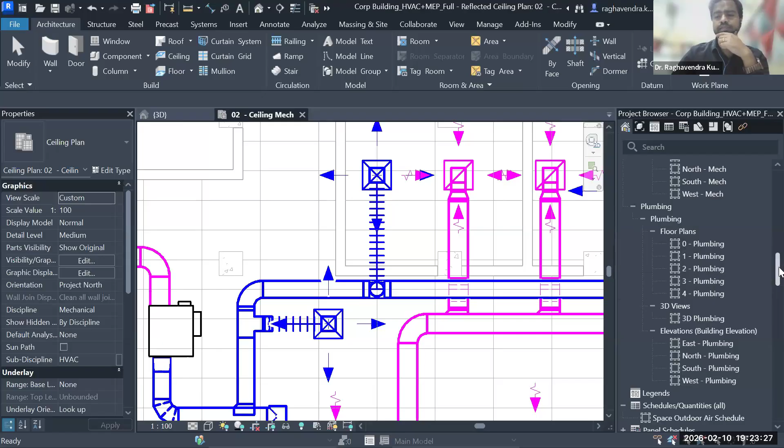So now I am opening this. So here you can see the ceiling plan. So this is the ceiling plan which I have opened. Let's see one particular component about how to create that, with the limited time we have.

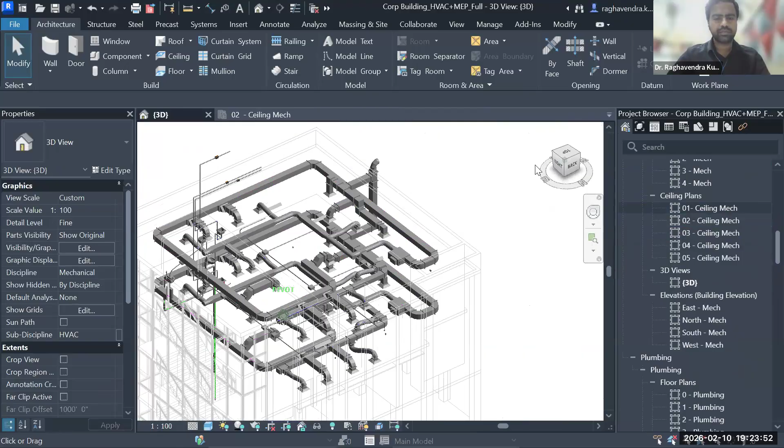Now, for example, here you see the connections for the first floor and second floor ceiling. You can see the air terminals placed as well as the HVAC ducts and flex ducts. Let me open that. So this is the particular view. These are the connections or the modeling paths. Let's see how to place that.

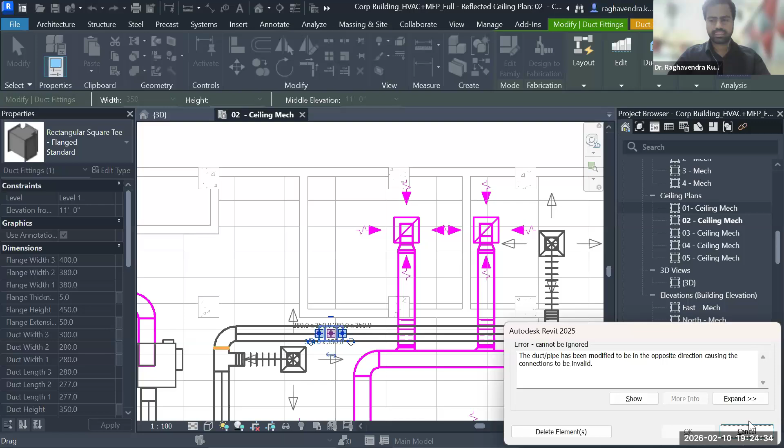So for that purpose, let me delete the existing ones. Right, so now you can see that the air terminal as well as the flex duct has been removed. Earlier there was one here, so now we have removed that. So now let's see how to place it.

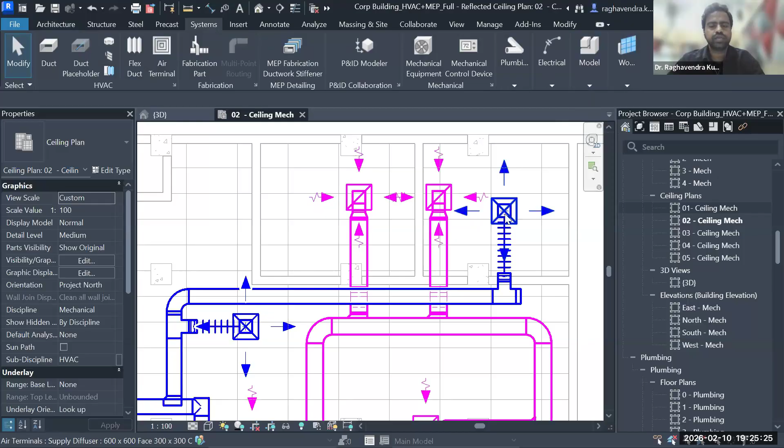Whenever you are starting your MEP components, the first thing you should do in Revit is switch over to the Systems tab. Once you move to Systems, you will find all the MEP relevant components. Firstly, the component which is here in blue color - that is known as the air terminal. So we should select that air terminal.

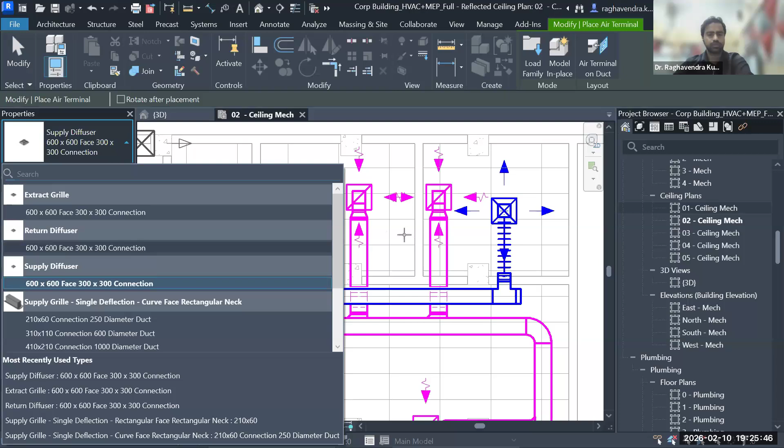Going to the properties browser, you can see there are different types of air terminals: one is the extract grille, after that return diffuser, supply diffuser, and so on. The color representation in blue is the supply diffuser. The return diffuser is pinkish, and the extract grille comes in green. So here you have this extract, which will come in green color.

So now let's place a supply diffuser, for example. I am going to this tab, selecting the supply diffuser. After selecting it, the first thing you should observe on the left side is the constraints - it should always be on the ceiling. Level 1 means the elevation from that level is 10 feet above the ground level. So I'm taking this and placing it.

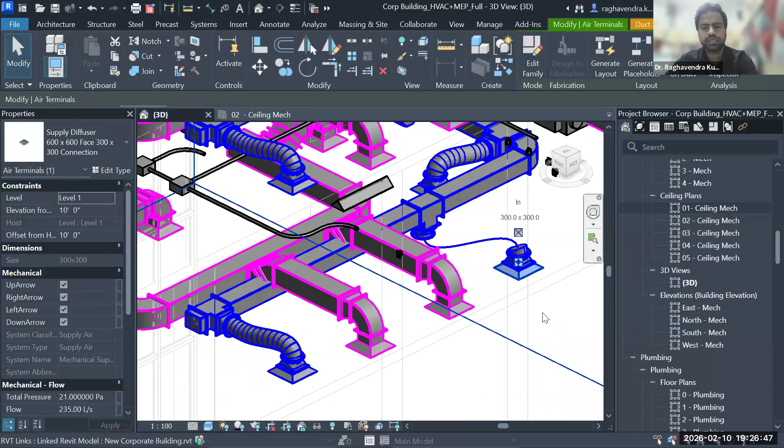After placing this air terminal, the next thing is I should connect it with the flex duct. So I am taking the flex duct, selecting the option for it, and connecting it. Like this, we can connect it. Now let's see that in 3D view. It should be moved further to represent the flex duct shape. Now you can see we have placed that flex duct to the air terminal. So like this, you can create it.

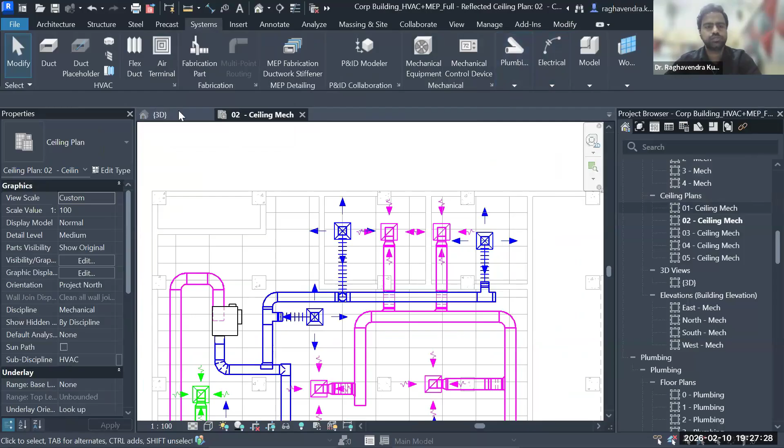So like this, you can create it for multiple components. As said, on the left side you will find the mechanical components, mechanical equipment, and mechanical control devices. If you move to the right, you have the electrical components - wire, cable, conduits, etc. And to the left of electrical, you have the plumbing components like pipe accessories, plumbing fixtures, sprinkler systems, and so on. That is how this particular project has been done with respect to MEP components.

So that is this one. Any queries with respect to this? Can I proceed?

If there are no questions, I will proceed to the last tool, that is MicroStation. This is with respect to the discussion we had as our last topic, BIM and GIS for infrastructure management integration. One of the tools we have is MicroStation 2025, which is a Bentley supported tool. Let's see how that can be done.

In the latest times, what they have got is the aspect of integrating Google Maps. I would like to explain why we are giving the Google Maps option: it is to help us visualize how this particular frame structure, or any particular building, will be represented in real time.

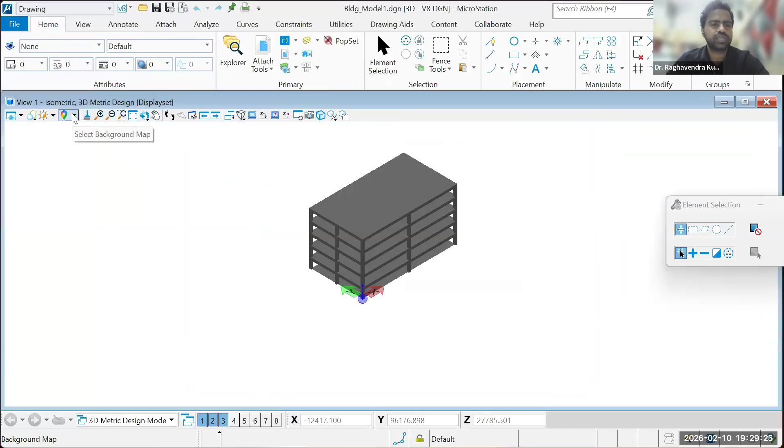After that, you should do some settings into the project. If you go here, you'll have the aspect of settings. For example, if you go to file settings, in the design file settings option, you will have options to set your project location. After setting the project location, you'll go to the map type, and instead of none, you will take the satellite or hybrid type.

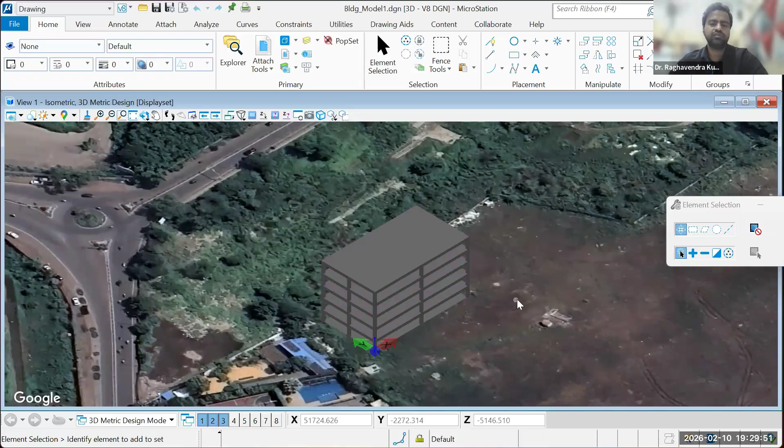Let's take the satellite imagery, which I have selected for my location. Now after selecting that satellite imagery, you can see how this particular model building will look like in the location which I have set for the project. So that is how you can represent it.

Of course, this is not the entire demonstration for BIM and GIS integration, but just an overlay of maps with respect to the modeled structure in the 3D BIM. This is because, as I mentioned earlier, the tool we have is the ArcGIS GeoBIM platform, which is really a very helpful tool in the domain of BIM and GIS integration, or if not, InfraWorks also. Right now I couldn't have access to that, so I couldn't show it in the demonstration here, but definitely if anyone is willing, we can get in touch and work on any project of the same type of interest.

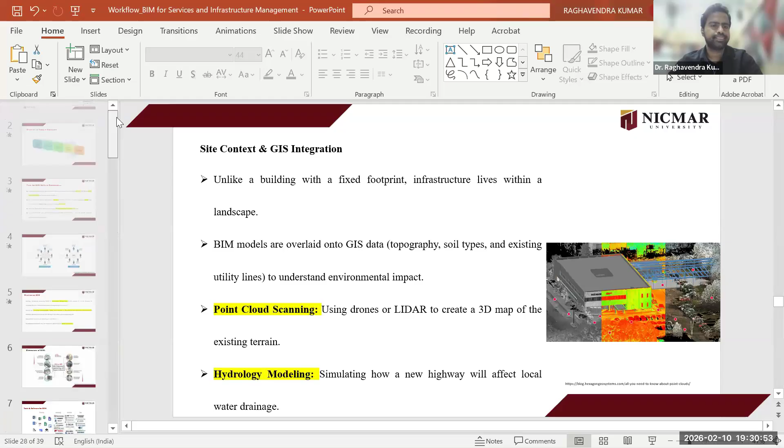So that's it with respect to the discussion for today from my side on the topic given. If there are any queries, I'm ready to answer. Participants, if you have any queries, please post your question in the chat box, or you can unmute yourself and ask the question.

How many years have you been into this, sir? My entire PhD is in the BIM domain itself, sir. Okay, so when did you complete your PhD? BTech is in civil engineering, of course. PhD, when did you complete it, sir? I finished in '22, sir. 22. Now afterwards you're practicing it? Yes, after that I worked in different organizations. Later I joined here at NICMAR 2 years ago. You explained very nicely, sir. Thank you, sir, I appreciate it. Thank you, thank you.

Sir, regarding the GIS integration, you have shown about ArcGIS, right? ArcGIS, yes, but not basically ArcGIS GeoBIM. That was only the usage of Google Map overlay for any building project you do. That is not ArcGIS GeoBIM. You can do that in ArcGIS GeoBIM. You can take the model and integrate it into ArcGIS GeoBIM. There is one platform, provided you have the license, you can do that with the overlay layer stuff and all.